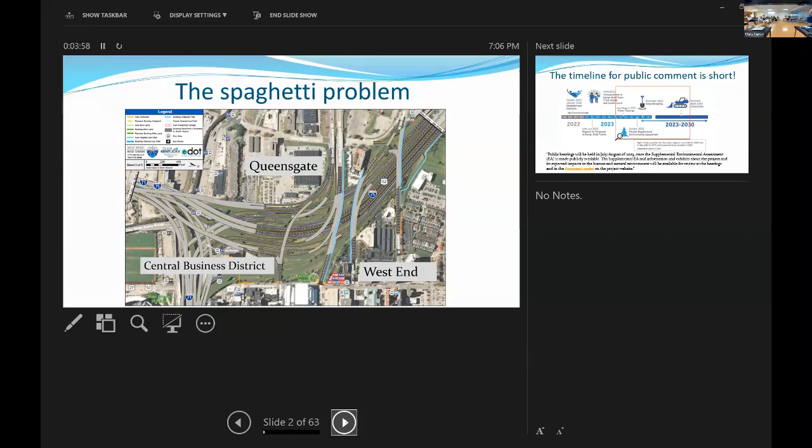Going to give you a very quick overview, literally 2 slides, about concerns that we've raised and we've taken to City Council, Hamilton County Commission, and it's the spaghetti mess that you'll hear more about from Josh Junker. But when we built I-75 and the 71 connection, we cut off and segregated literally Queensgate, West End, and the Central Business District. So we have a chance to take care of that.

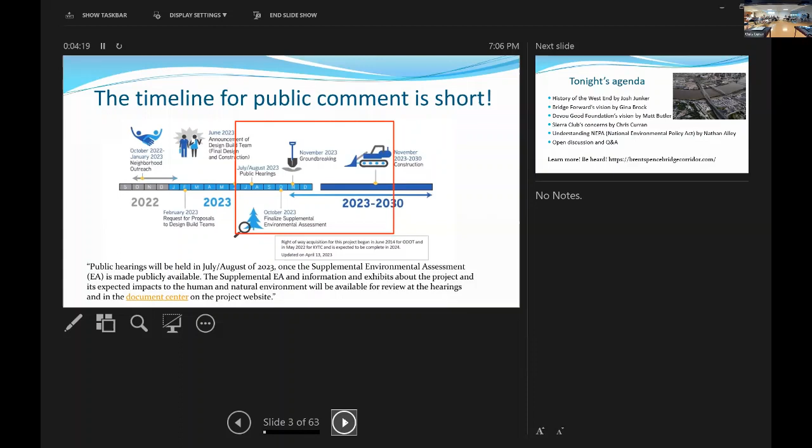The other reason we're doing this in July in the middle of summer is the public comment period is essentially very short. The current website says July to August, we know it starts July 5th. So when it's time to act, which we'll talk about at the end, we want to make sure that our voices are heard. So what we're going to do, because it does take a lot of different expertise...

With our panel, we have Josh Junker from Bridge Forward, who will talk about the history of the West End and the environmental injustices. Gina Brock, Vice President from Bridge Forward, will talk about their vision. Devou Good, we have Matt Butler, who will show some animations of what is possible. And then I'll talk about our concerns.

So we're going to get sewers in here, we're going to get air toxics, we're going to get water pollution, of course, covered. And then one of the important things is responding to the updated environmental assessment. Fortunately, we have Nathan Alley, our full-time staff, who has quite a bit of experience with NEPA. So he will explain what it is and how we can use it to all build a better bridge and a better community. So I really appreciate all of our guests.

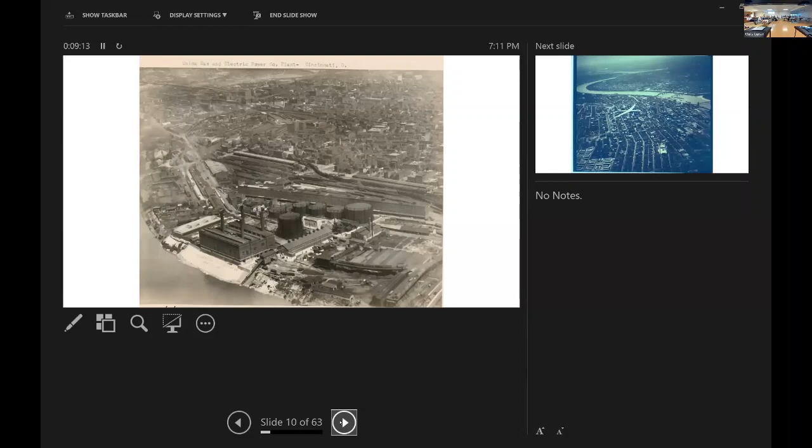And this is a really good picture that I found. These are all from the National Archives catalog, which I hadn't really perused until about 2 weeks ago. I was like, oh, they have really high quality images.

This is kind of what we're talking about. So that's Longworth Hall right at the foreground behind the tanks. That's that plant that still exists today. They built that in the late 1920s. You can see the rail yards and everything right there as they existed. And then just beyond there, that's the Lower West End and where it begins.

By the late 1920s, when this was taken, you can tell it's the late 20s because the terminal isn't in there yet. You can see it's a very thriving neighborhood. It's very dense. It reminds you of what Over the Rhine is like. It goes all the way towards Lower Price Hill. It's only separated by the Mill Creek.

And it's approximated around this time, around 71,000 people lived in the West End. This peaked in about 1900, where we had 84,900 residents in the neighborhood of the West End.

This is a really cool photo, and it kind of illustrates what had started changing. So this was actually from, I think it was a B-36 - someone corrected me on Twitter about that - B-36 test run in the early 1950s. Below it, you can see downtown Cincinnati. It kind of looks recognizable, and then you look at City Hall, and everything after City Hall is still kind of intact. There had been some industry that had started to develop and everything.

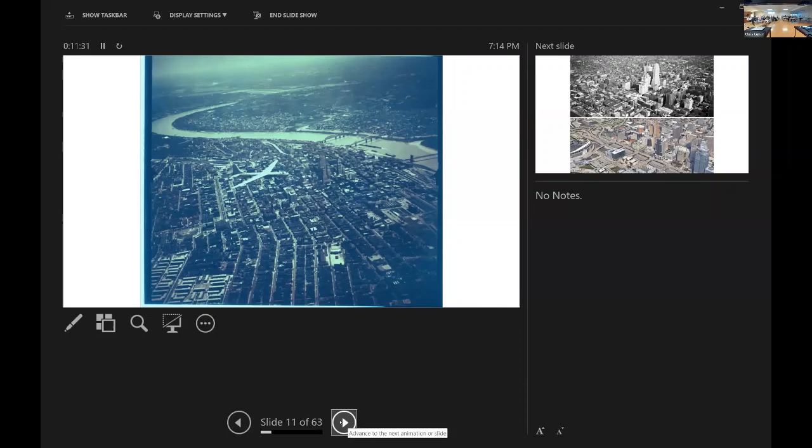And this also shows what we're talking about as well. So that's a view, and it kind of shows not only the destruction of our riverfront that we did by building the 3rd Street distributor, which is known as Fort Washington Way, but it also shows how much of a gash we cut in by building the highway west of downtown into the West End. It's amazing looking at the Cincinnati telephone building still exists, which is like a 150-foot structure.

Everything west of there is similar to Over the Rhine, same architecture. It was built around the same time period. Most of that was like Italianate architecture of similar style as Over the Rhine. And it was actually, in my opinion, built better because it was built by wealthy Cincinnatians from the 1860s to the 80s. A lot of that was built really well.

And then around the turn of the century until around the 1920s, the Great Migration began, and slowly the West End began to become the center of Black culture in Cincinnati.

What made this interesting is - I don't know if I put in a flood picture, I don't think I did - but the '37 flood marked a really key turning point for the West End because half of the neighborhood got flooded. And unlike all the other neighborhoods that got a lot of relief and were able to rebuild very quickly, didn't have filled in basements of water still 15, 20 years later, the West End, because of redlining practices at the time, wasn't able to repair the masonry that was there, unlike other city neighborhoods that were able to get access to that funding.

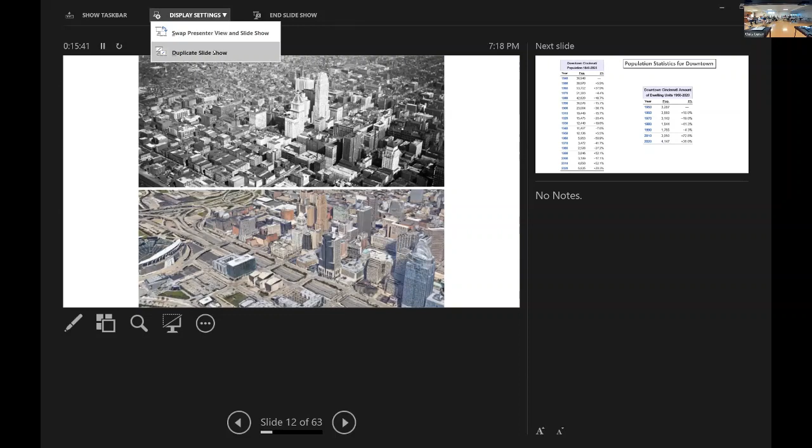The interstate caused a lot of the damage, but it was the city of Cincinnati that put the final death knell in the neighborhood, through their urban renewal plan. You hear statistics that say 6,600 families were displaced. That was a smaller portion west of the highway that included the highway right of way and was west of Interstate 75, basically in Queensgate. But if you include the entire projects, because the federal government said these are too big, you can't have them all in one project, if you include the entire total, it amounts to about 12 to 15,000 families displaced from 1956 until 1967, around that time period.

A lot of the damage was done with the spaghetti junction and Queensgate. There's opportunity with Queensgate, which was envisioned as an industrial center in the late 50s. They built it and envisioned 17,000 jobs, and I think now it has about 5,500 jobs down there. It never met projections. The motorways plan there was built for about 12,000 cars an hour coming out at peak rush hour times. It never comes close to that. I think Gest Street sees that in an entire day on average.

We kind of look at that as an underutilized area of what used to be a neighborhood. The city purposely stepped into that and said, this is what we want to do, and we think it's right. Every single time, every 10 years, there's a reevaluation process of what are we going to do at Queensgate. And everyone kind of says the same: it was poorly designed, it never met expectations. It tore down an entire neighborhood that drains what would probably now be a valuable tax base for the city, all for light scale, suburban scale industrial development that never met the expectations or created the jobs they were envisioning.

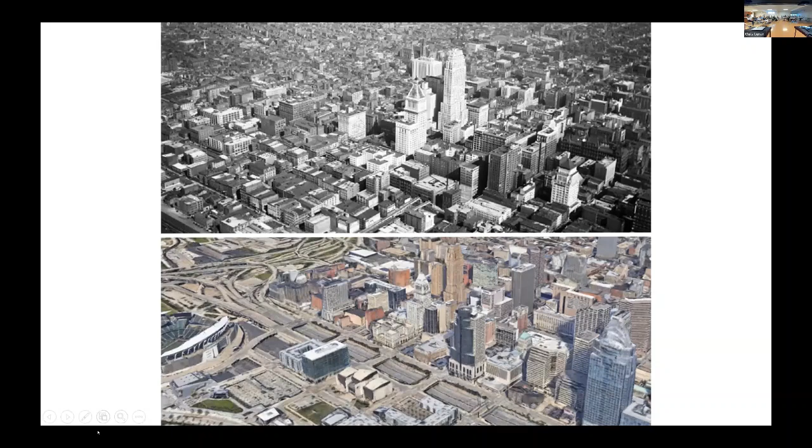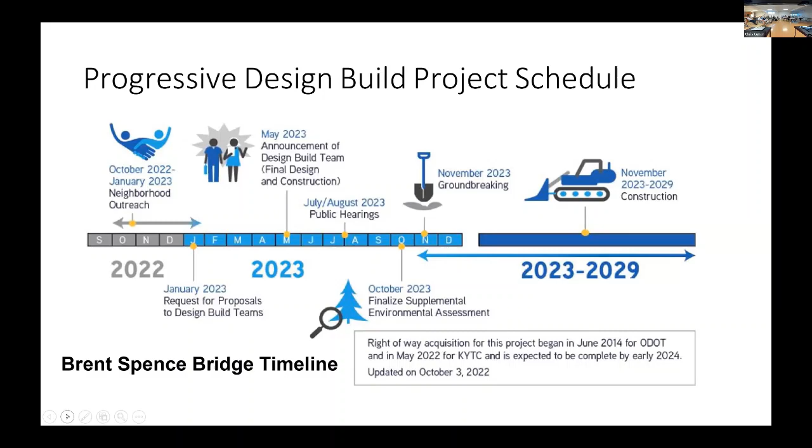So the reason that we're able to do this, the reason we haven't been shut out or not had enough time, is because this is what's called a progressive design build. You guys understand most construction consists of: you plan it, you bid it, you build it. In this particular case, especially based on the size of this project, they're going to start, as my understanding is, with the bridge in the river. So the design of the progressive design build project schedule is meant to accommodate changes, upgrades, everything that needs to happen with conversations with communities. It's specifically designed to allow this to happen. We don't have a hard cutoff date where past this date nothing can change. That's inaccurate. But this is the first and very large progressive design build ODOT has taken on.

So Brian Boland, he's the president, and the one who came up with the idea of what can we do to make the bridge happen, even when it's being stopped by the fact that Kentucky got smart and said you cannot legally build a bridge from Kenton County to the Ohio side of the river - it's in law, you cannot build a bridge there if you toll it. So he came at this trying to decrease the expense of the project so we could see if it would happen. At the time he came up with it, there wasn't funding there, so he was investigating and putting thought into it.

And he looked at Fort Washington Way and said, we gained 14 acres in Fort Washington Way. We went from 23 different on-ramps and off-ramps and a whole lot of traffic problems and crashes. We made it safer, we made it faster, we reclaimed land. Why can't we do it again? Let's look at this project and do the same thing.

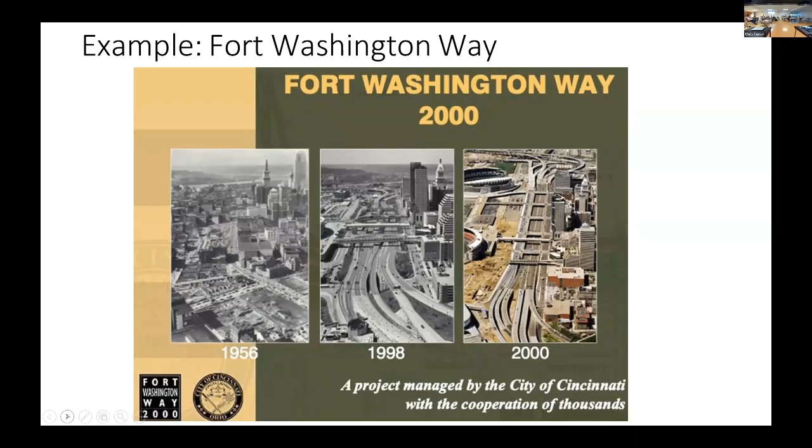So a small progressive design build project was actually the Martin Luther King Jr. interchange, and it's a good example of what ODOT can do when they work with the communities they build in. They listened, they talked about what we wanted. They did some things that were a little outside of the norm - it has the world's longest off ramp, over a mile long - but they listened and did what was requested, showing there's a lot of benefit to be gained from working with ODOT and taking our feedback as a community, doing the things we would like, because we're the ones that live here. We have a little bit of opinion about it.

So far, right now with the current IW plan, we do get back 9.5 acres of usable land. It does have on-ramps and off-ramps as requested back in, I believe it started in 2004, 2005, 2006. They do have the connectivity that we asked for then, and they have redesigned overpasses for improved pedestrian and cyclist experience. However, if you're still going to go a half mile on an overpass, no matter how pretty it is, it's not going to be as usable nor attract people as much if you shorten it and make it integrated into a street grid. Any improvements are fantastic, but we think it can be better.

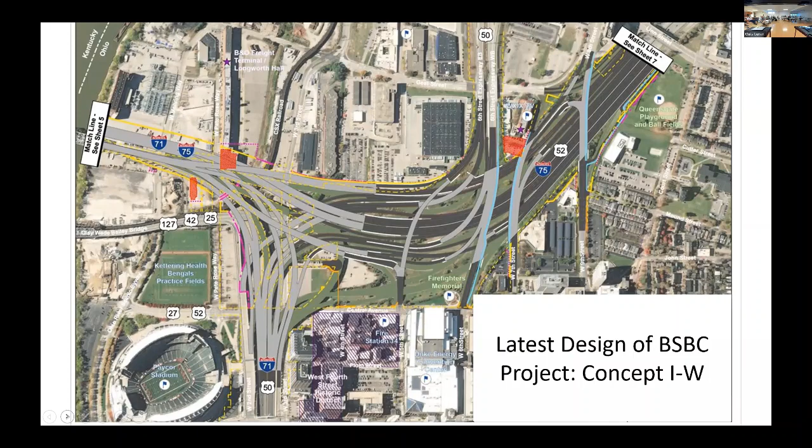So I do appreciate the work ODOT's done, but we can do everything that ODOT needs this bridge to do. The on-ramps, the off-ramps, everything on the Kentucky and Ohio side — our plan can give everything to ODOT that they need to make it work. But we can do it better, in our opinion, for Cincinnati.

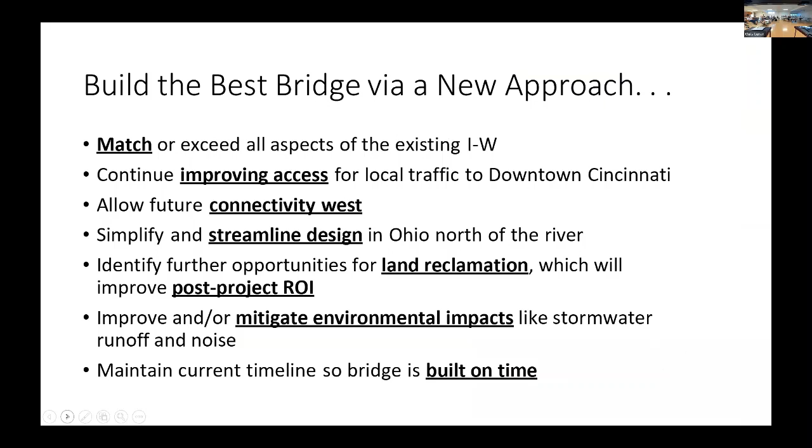So I'll tell you right now, this is the more cartoonish version. We have had our ideas vetted by an actual traffic engineer in Indiana who's certified in Kentucky and Ohio and well respected in the industry. But we're going with this version, which I fully acknowledge is pretty tidy — anytime an engineer gets in there and actually does things, everything gets slightly bigger. So the reclamation of the green here is not going to be quite as clear when we go with the final design. But this color coding makes it a lot easier to understand.

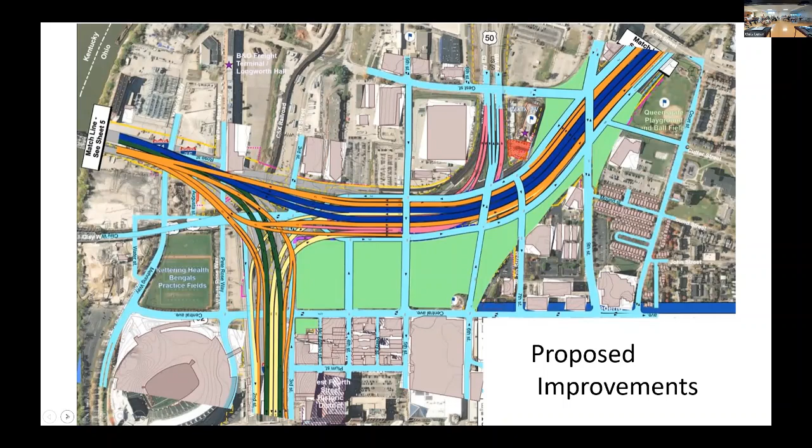So in our improvements, we want to have a Fort Washington Way style connection. We want to make US 50 a little bit safer and saner to keep that connectivity, but make it easier to get on the expressway and into downtown. We want to simplify exiting — instead of on and off ramps, we want to reconnect the street grid. As you see in Fort Washington Way, the street grid runs right over top of it, and you have the benefit of that being a street block instead of on-ramps and off-ramps everywhere.

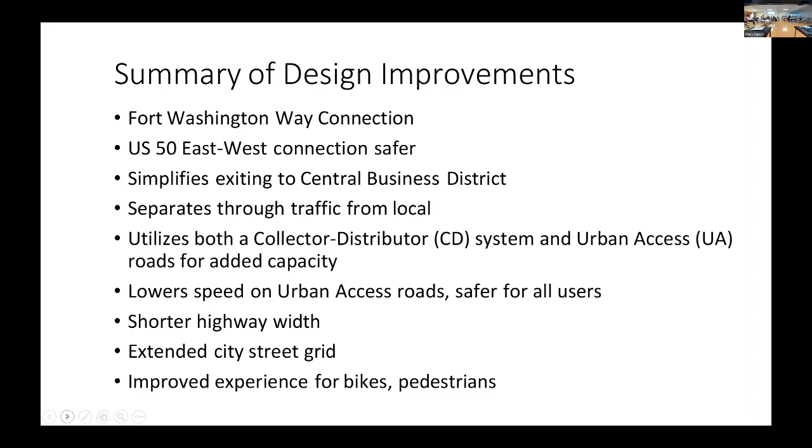One of the other things is that the shorter highway width really makes that space much more attractive for walking, pedestrians, and cyclists, because you're not baking in the sun as you go a half mile across an expressway — you're just going down a city grid street. And any land that is reclaimed has street frontage. We can reclaim all the land we want, but unless it's well connected, it's not very usable. Right now we have a lot of green over there, but it's not like they built on it, because there's not a lot of ways to get there. It's not very useful. But you reconnect the city grid, and all of a sudden you get all sorts of benefits to reconnecting Queensgate with downtown.

And then you get a lot of other asks, and you guys are interested in some of these in particular. For example, big fan of the idea that if you're going to go in there and touch things, then fix what's there. If you're going to dig up an area, do the work that needs to be done while you're there, particularly for MSD improvements.

They are doing this for the Kentucky side. They are getting a stormwater handling system on the Kentucky side that is great for them. It's going to take care of some of the problems they have, separating and preventing flooding, addressing those sort of issues. We can get that on this side. And now that we have the policymakers of the city and the county on board, those requests are being made.

So our goal is just to make sure that we ask and we get. And right now, ODOT seems to be very much in the mode of listening and understanding where we're coming from when we're making these arguments.

So, I can take questions now, or I can continue on and break down this picture. Quick question, can you just...

Flesh out what separating means for everybody? Oh, the concept behind MSD.

So as most people here probably know, Cincinnati has a problem with combined stormwater and sanitary sewers on the regular. When you have too much stormwater, it dumps into the sanitary system, and then you have overflows. We are under federal injunction to fix it, and we have gone to great expense. The South Paramount project that was just done is a good example. There are different things in the Brent Spence corridor that could be improved, and if we're going to go in there to do the work, those things should be addressed while we're there, because we're under federal injunction to get it done. If we're going to break open the ground over there, let's do it while it's there. You don't break off the drywall from the wall, look at the leaking pipe behind it, and then put the drywall back up. You fix it while you're there.

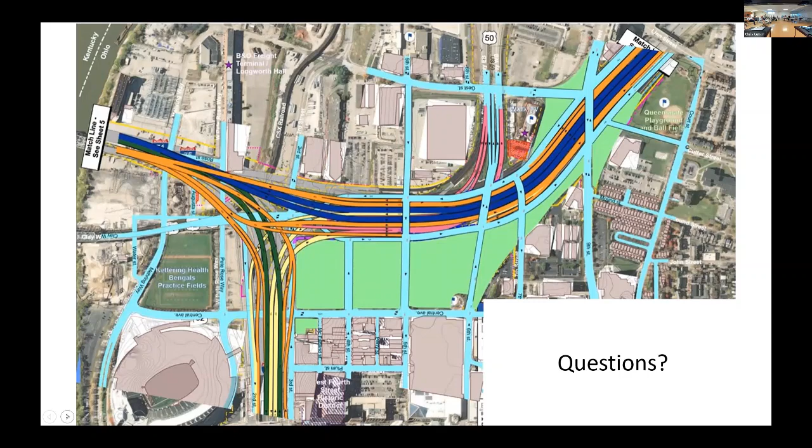I've got a small question that's not directly important. Do you have any input at this time from Jim Tarbell? He has been somebody that parts of our organization have spoken to, but I do not know his actual personal opinion. Yeah, I believe he's been spoken to, but I don't know what his opinion is on it.

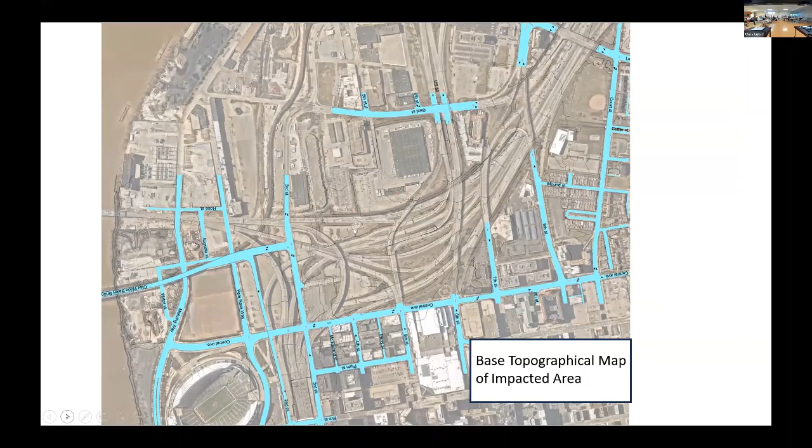We can skip through these, or if we're running out of time, I can go through them real quick. We're a little over, but you said you can slide through, so let's do this. This is the base map. You have the city street grid called out in blue.

Next slide. We have the same amount of connectivity for 71 and 75. ODOT's IW plan only has one extra lane heading on 75. We include that extra lane. The rest of everything else is reconnection.

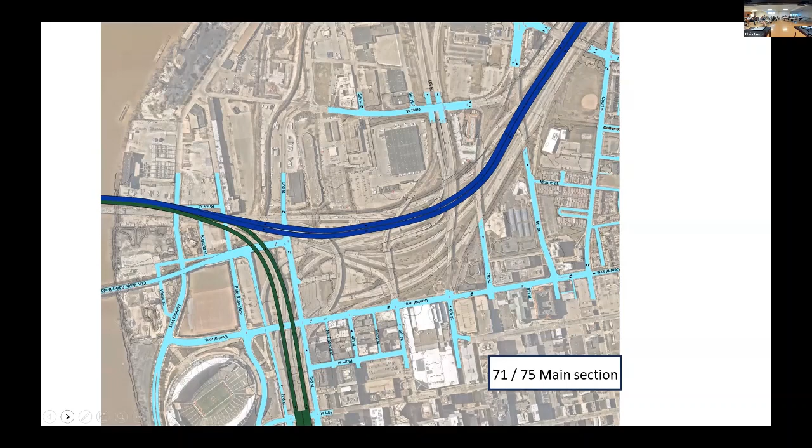So we would like to see a collector distributor that is surface streets. It connects Queensgate, which, as Josh pointed out, the market's kind of spoken on how much new and innovative business has been attracted there. Not a ton—right now it's sort of a location for a lot of trucking companies. This could change with a reconnection to downtown.

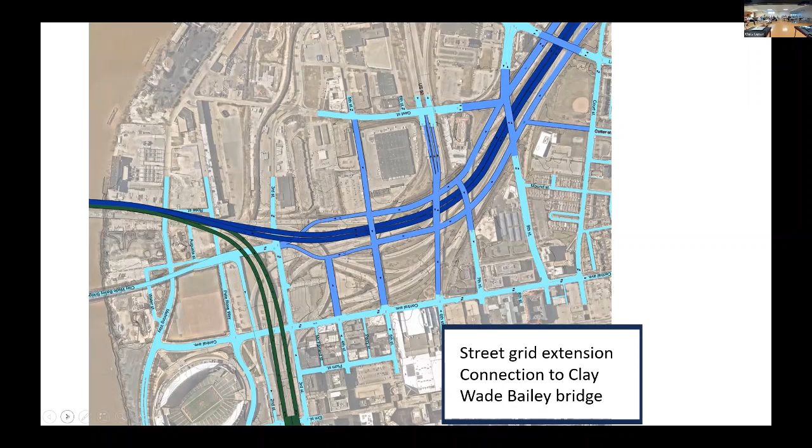71/75 connections are maintained. A local traffic connection collector distributor is also preserved from the IW program. It just connects slightly differently and brings a lot of stuff tighter in. Again, with the actual engineering drawings, those do get wider, but not as wide as what IW does.

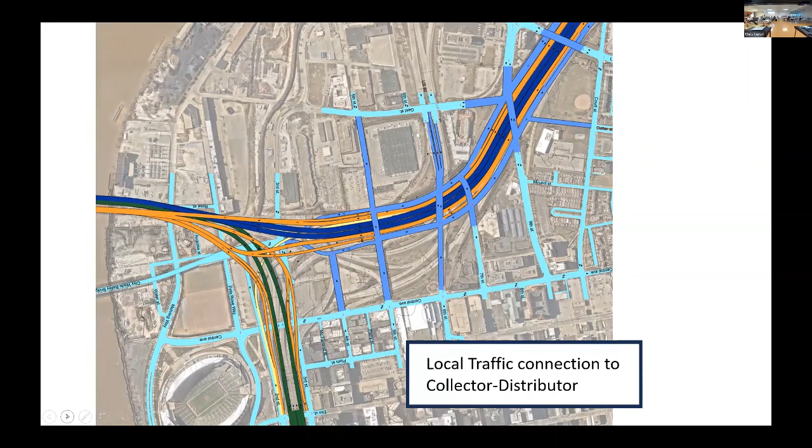Now, part of the reason is because we take US 50, and instead of doing what IW does, we bring it in and it kind of goes into what they're wanting to call a tunnel. Some engineers say it can be more of an open, vertical overpass system. That is still being decided, but people are taking a look at that.

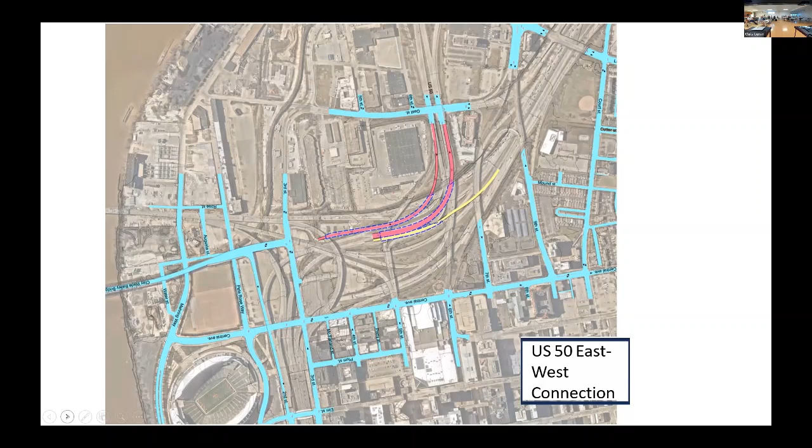And then US 50 to I-75, we keep that connectivity for all of the west side, and then you have all the connections. Ideally, this is pretty to look at, but even when the engineers get through with it, we still capture vacant land. But the street grid makes it usable.

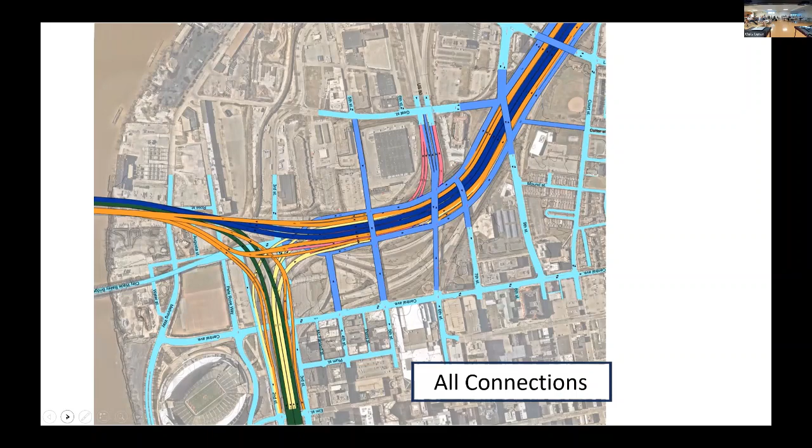Great. So what we're going to do is then hear from Matt Butler, who is the president of the Devou Good Foundation, who has invested heavily in this work and also has a vision.

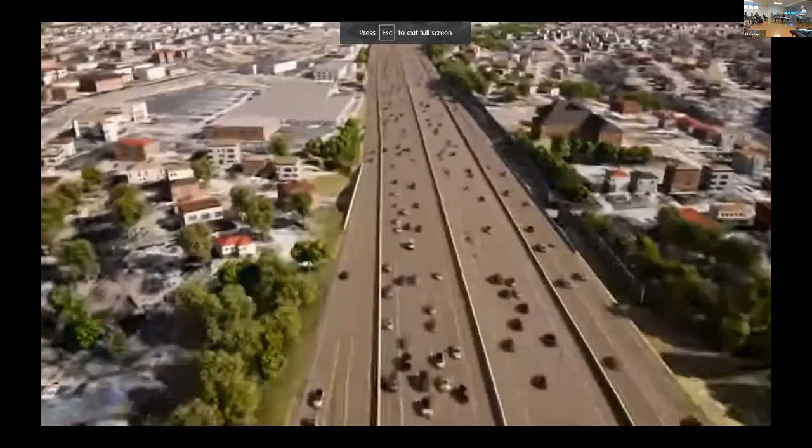Gina talked about safety on the bridge. KYTC, I believe in the 80s, restriped the bridge and prioritized speed and driver throughput over safety. So it was 3 lanes with breakdown lanes, and they restriped it to 4 lanes, thinking that would allow more vehicles to pass through. Since 2014, traffic has actually dropped on the bridge.

We've got a graphic to show you that. But projections from ODOT and OKI have all either remained about the same or gone up. And of course these are projections they're saying are 15, 20 years in the future, so nobody's going to be around to hold them accountable for that. They just keep doubling down on this.

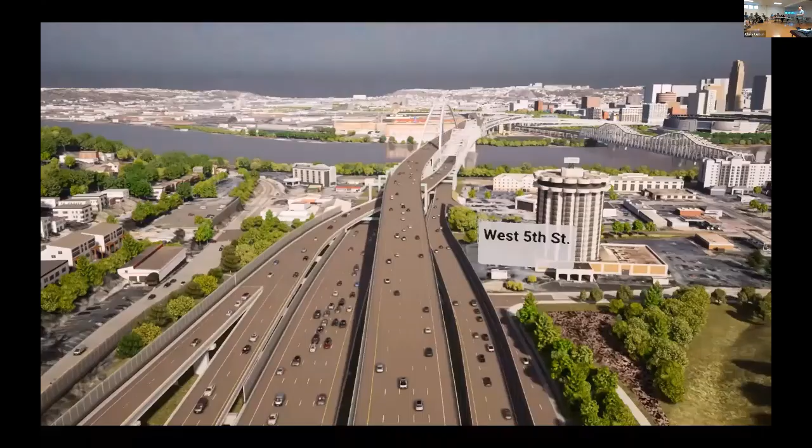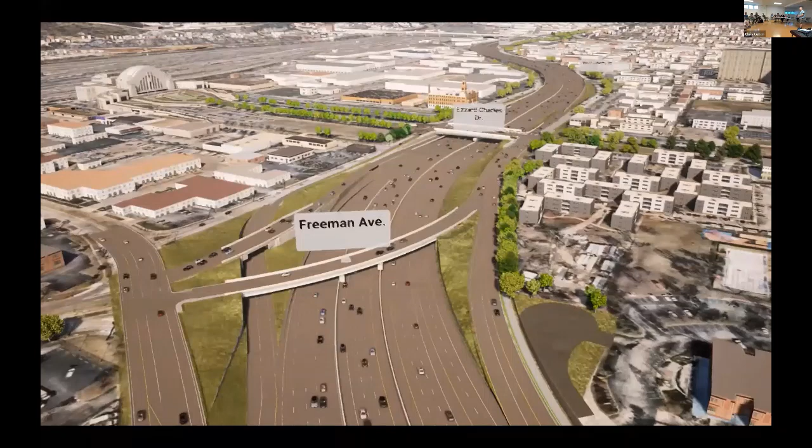Well, it's been 20 years and now their projections are pretty current from what they said 20 years ago, and they're not anywhere near what they said. They were saying 225,000 to 250,000 vehicles a day on the corridor, and we're around like 140,000, and it continues to drop.

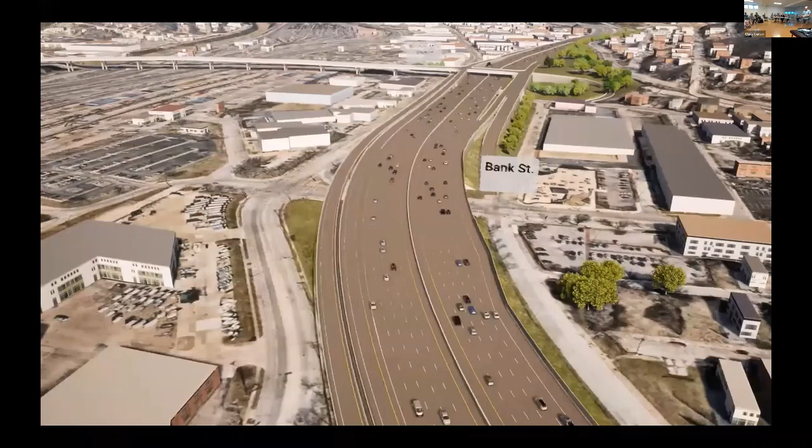We also think jamming this other bridge up against the current bridge is not good aesthetics for the city either. If everybody wants a nicer bridge, why don't we just remove the one that's there and put in a new one? We all survived it being shut down for a couple months, a couple years ago.

I think some other data points. I'm not as good as Josh, I can't recite the whole presentation off the top of my head.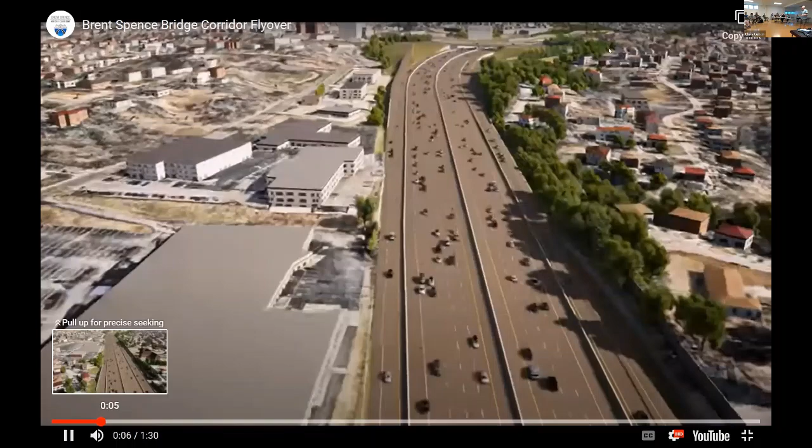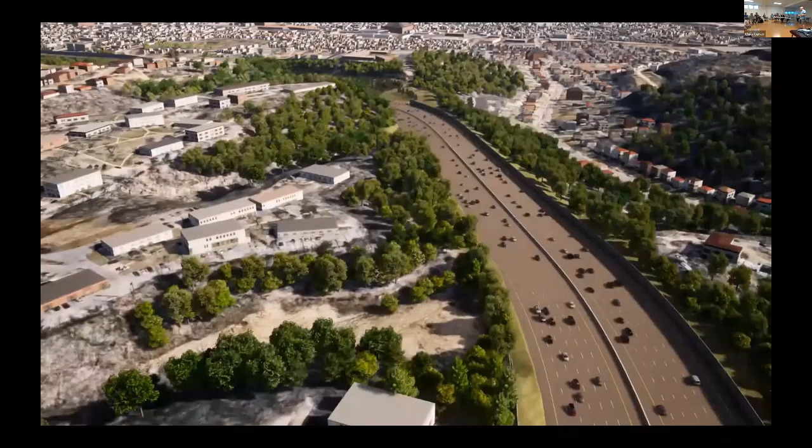But the communities that are impacted, the West End communities, the communities in Covington, these populations are largely minority - Latino populations in Covington, African American populations in Cincinnati.

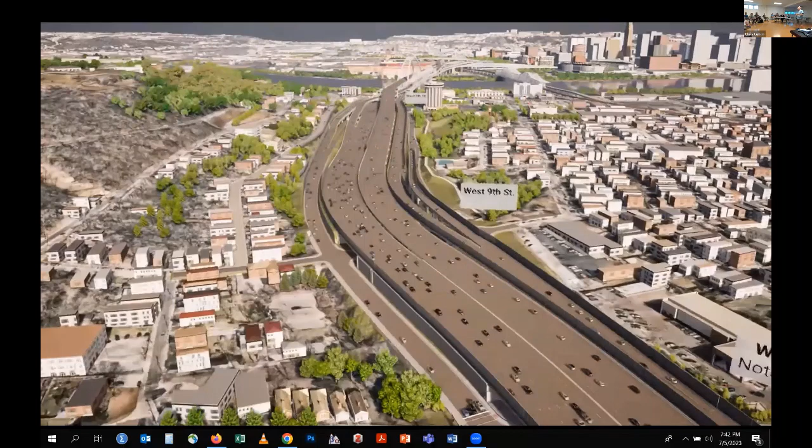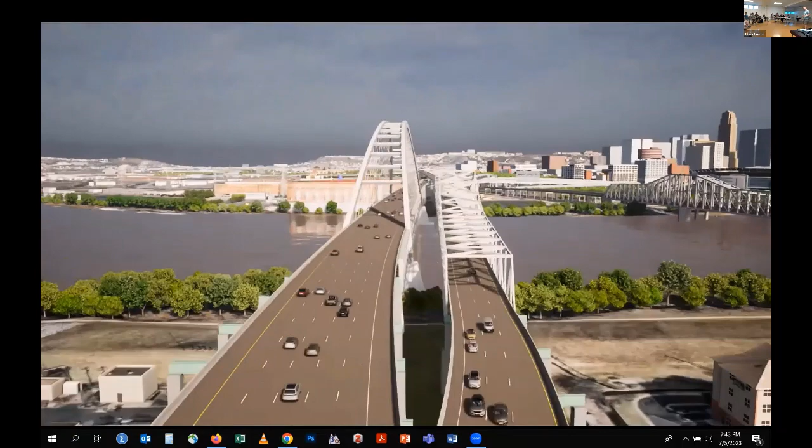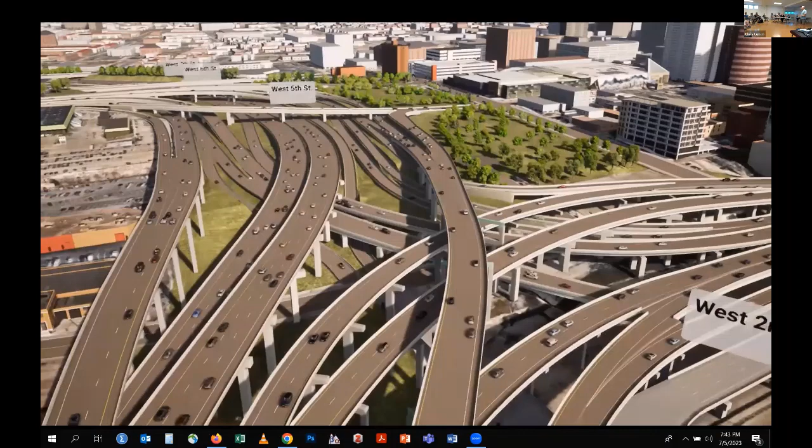Does anyone know what percentage of households don't have access to an automobile in Cincinnati? Like 20 or 22%, yeah, 22% exactly. And a lot of these neighborhoods that are adjacent to the bridge, in Covington, there's one that's 40% of the households don't have access to an automobile.

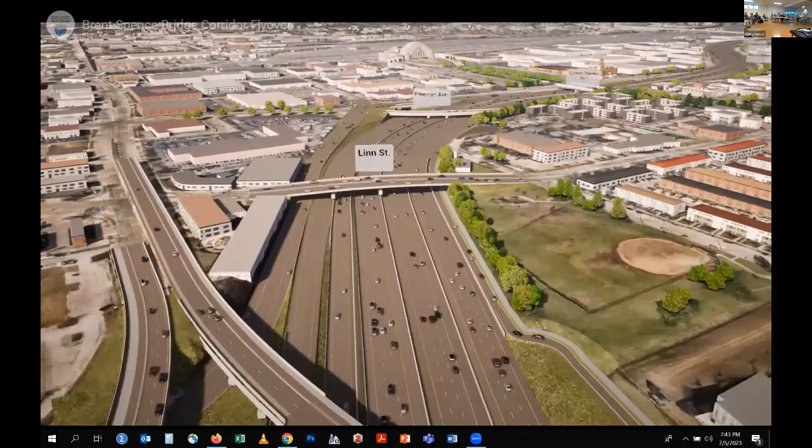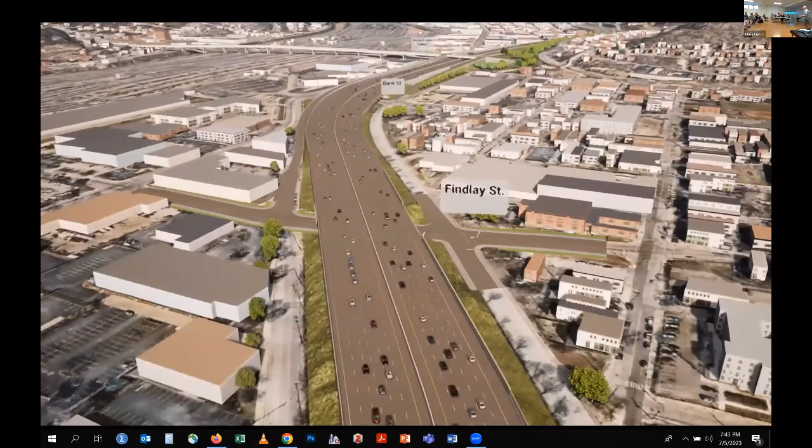Cincinnati, the West End, on the inside - what is that called, between 75 and downtown, that part of the West End? The West End, right? Yeah, that one is over 50% of the households don't have access to an automobile. So the people that are going to bear the brunt of this through more air pollution, more sound pollution, more stormwater runoff, they won't even actually be able to access it because they don't have an automobile.

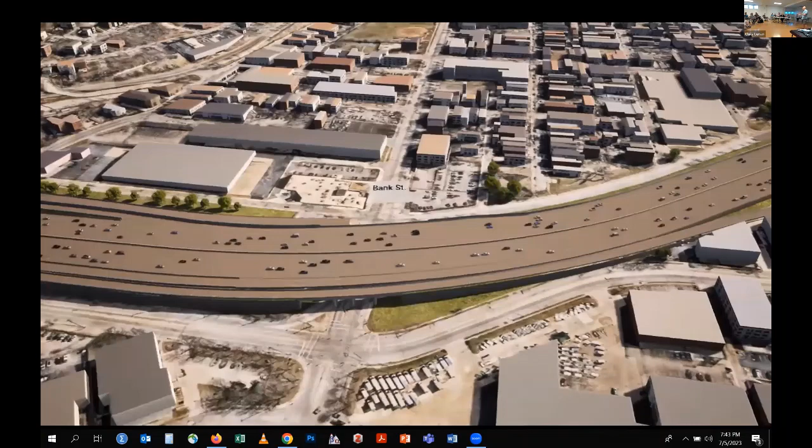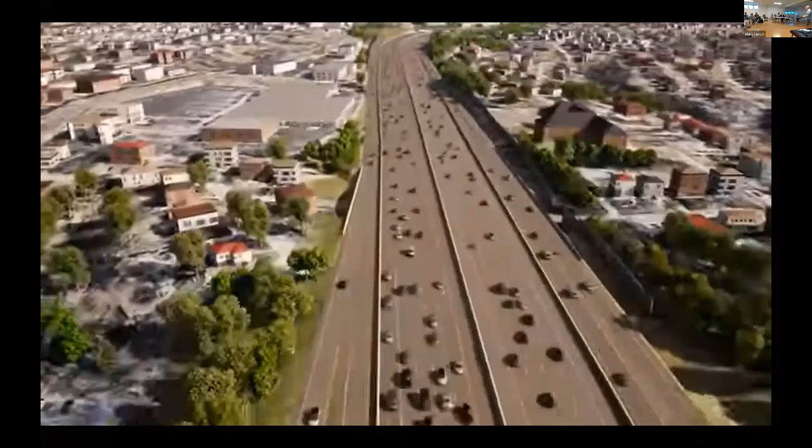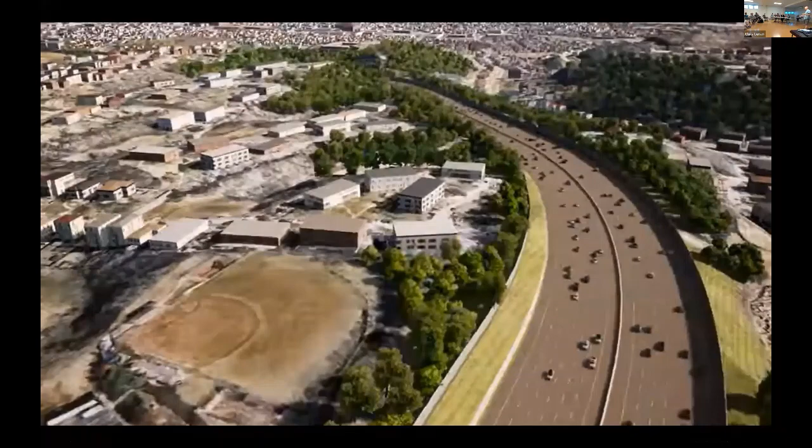And where did this plan come from, and why do we have this plan? Well, there's a plan, it's on OKI's website. It was put together over 20 years ago, it's called the North-South Plan. You can Google it, look it up, we've got a link to it as well. The North-South Plan is thousands of pages long, and one part of it talks about expanding the I-75 corridor, adding more lanes.

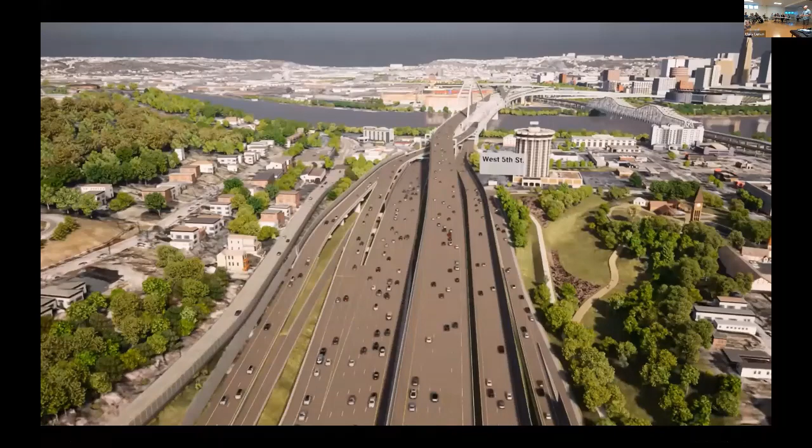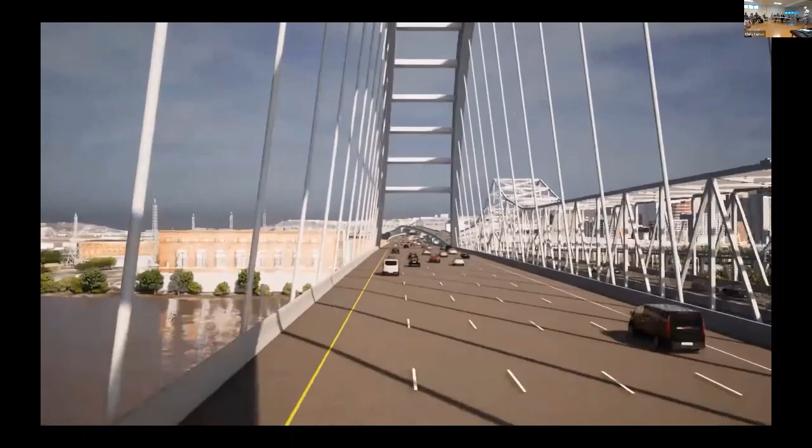But it also has transit, commuter rail in there as well. So they've pulled this shovel-ready plan off the shelf because all of a sudden the federal government said, here's all this COVID money. This project is greater than ODOT's budget for the whole year, for the whole state of Ohio, so it's enormous. Austin's building light rail for about 100 million a mile, so we could have a fully outfitted light rail system for $3.8 billion. And that's actually in this plan, but they're just choosing to ignore it.

Talked to John Brazina at DOTE. He said, well, this is a car town, no one's ever told us that they wanted anything but more roads. And I interrupt briefly - yes, the cost of maintaining rail is so extremely low compared to roadway, that alone could really make a difference.

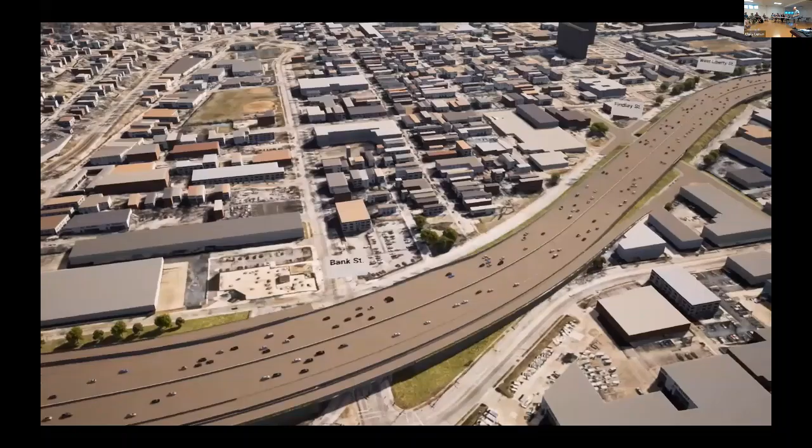Yeah, if you've heard, Cincinnati has a major issue with resurfacing roads, right? We're supposed to resurface 100 miles a year, and we're barely getting 30 miles done because the cost of chipping off the top bit of asphalt and putting it down new has gone up, and the budgets have gone down. Thank you, so yeah, absolutely.

Not only that, but the roads that we have are too wide, and that's another reason that speeds are high, people are dying.

That probably took it away from the person. Yeah, I was afraid that would happen. I think... so now you guys can finally see it. They've seen it five times.

So this is actually ODOT's video. As you notice, it doesn't really have any trucks on it, it doesn't have pollution, it doesn't have sound. You can now - the cars are happily spaced nicely.

Yes, I think that a big issue for Covington is the massive size of this. So right now it's a double decker, right? There's one layer off the ground and then another layer on top of that off the ground. They're going to add a third layer on top of that to get to the new bridge. And so Covington's most focal point is going to be this massive flyover.

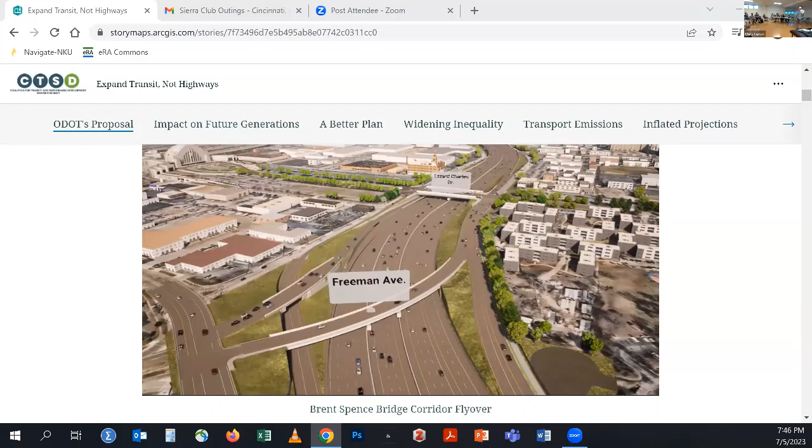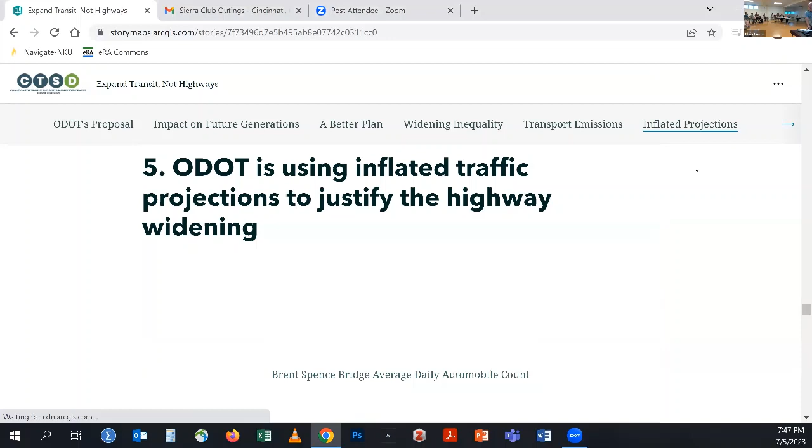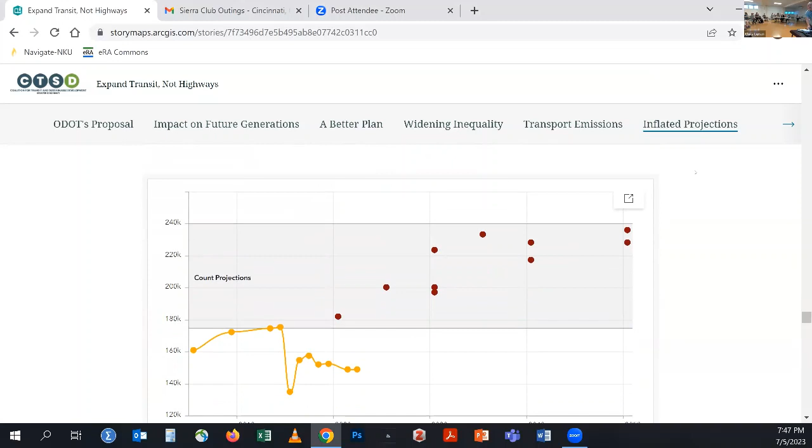So I think that I will quickly show you the inflated projections here. So the yellow is the actual counts and the reds are the projections that have been made over the years. Would you like a chair? I'm good, thank you. So I always get the question, well, what happened in 2011, 12, 13, this major dip right down here, right?

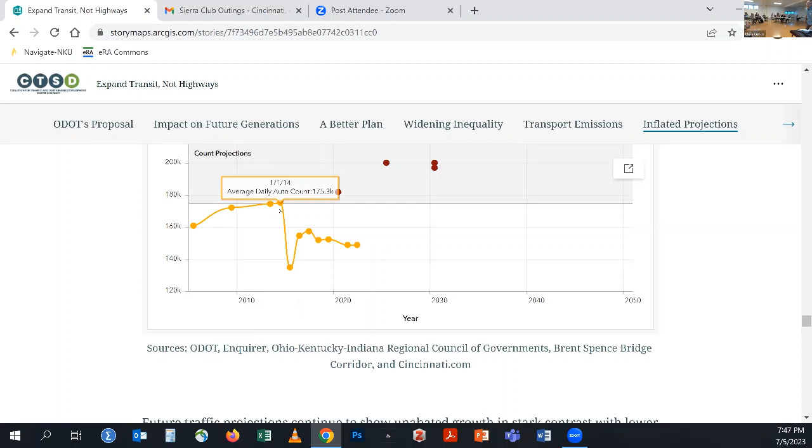And through research, the only information that we've been able to gather is this quote from Lori Platt at OKI. The reason for the reduction in traffic on the Brent Spence basically in 2014 is due to the construction north of the bridge that began in 2011. And if you've been paying attention to that corridor just north of the bridge, it's still under construction, right? We're 12 years later. And so drivers have kind of figured out, okay, I'm going to avoid that and go a different route or combine trips.

And so ODOT basically did this to themselves, and it's never recovered. So it came back up a little bit, but it's slowly gone down. We took 2020 out because that shows a major drop and it just throws the scale off and it's really not pertinent. But you can see where the red dots are - these are the projections that have been made, and these are ODOT's, OKI's, KYTC's projections.

We've gone through all the archives in the Enquirer, because they started talking about this around the year 2000, and that's when they started putting out these inflated projections. So we're at 145, 150,000, and we were supposed to be at about 180,000 plus. In like 3 years, it's supposed to be at 200,000. I don't think anybody, even the traffic engineers, believe any of that will happen.

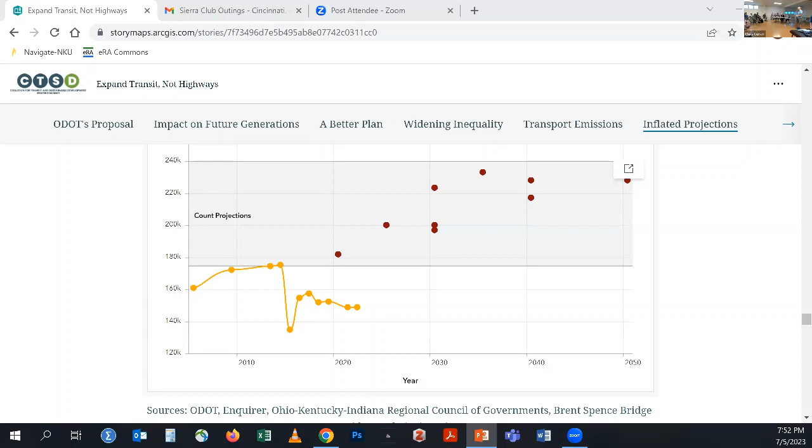Have you explored, beyond the local issue, the question of freight movement by truck? It's not very long ago that we had a pretty good classification yard down here, and most freight was moved by rail and then trucked out to delivery points. Trucks are the major problem on 75 now.

Yeah, I can say from my background — my wife and I started an e-commerce company in 1999 called Signature Hardware, located in Erlanger. We shipped product, mail order. We bought direct from factories overseas and brought it into 400,000 square feet we had in Erlanger, then shipped one part at a time out to retail customers who bought online. The cost to truck freight is so enormous compared to rail, so we always focused on getting it from the port via rail, but of course the last mile has to be truck.

We actually owned a warehouse that had a rail spur to it — it was a paper warehouse at one time — but they've pretty much eliminated that type of transit. There aren't many companies that actively use their rail spurs to ship anymore. A lot of times customers want the product quicker, and truck could be quicker. At the time, I think it was 4 to 5 times more expensive.

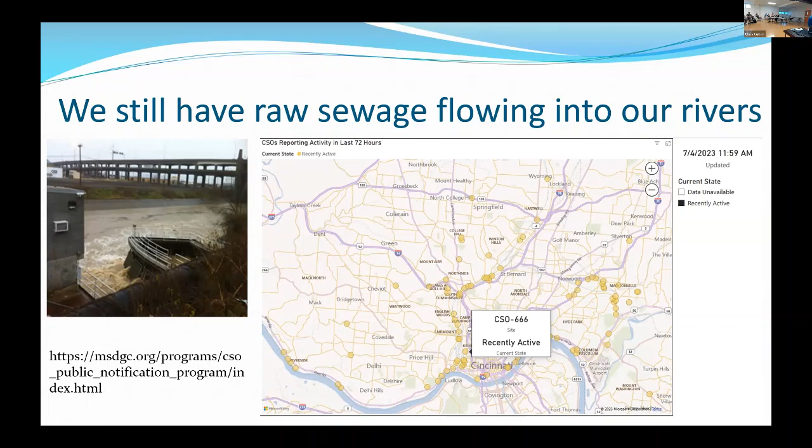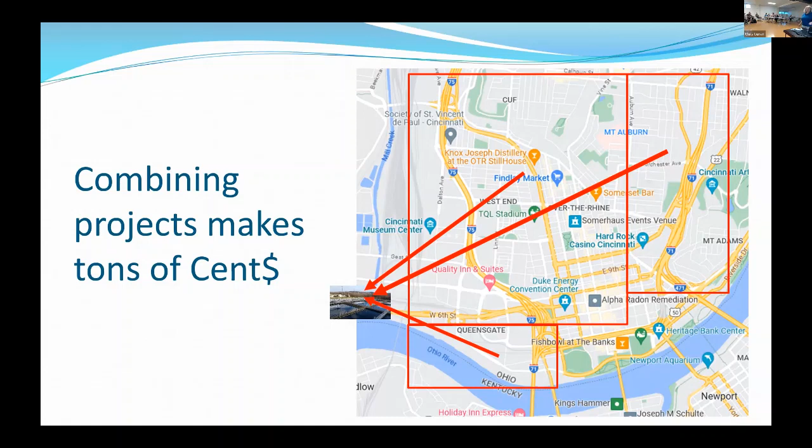So right now, this is a map. Bob Park helped identify where these combined sewer overflows are. And so what will happen is it either is going to end up at the Mill Creek plant or overflowing directly when there's too much stormwater. So combining projects makes a lot of sense because this is the target area, what we're calling the land of opportunity, where most of these are, as you saw, are right where they're going to be digging things up and changing things.

And it's been done before. So the blue, Fort Washington Way, Smale Riverfront, the two stadiums, we've done it. So those are now separated. And what happened now is they separated them up north, and then they get recombined down here. Makes no sense, right? So these are maps that we've taken to City Council, Hamilton County.

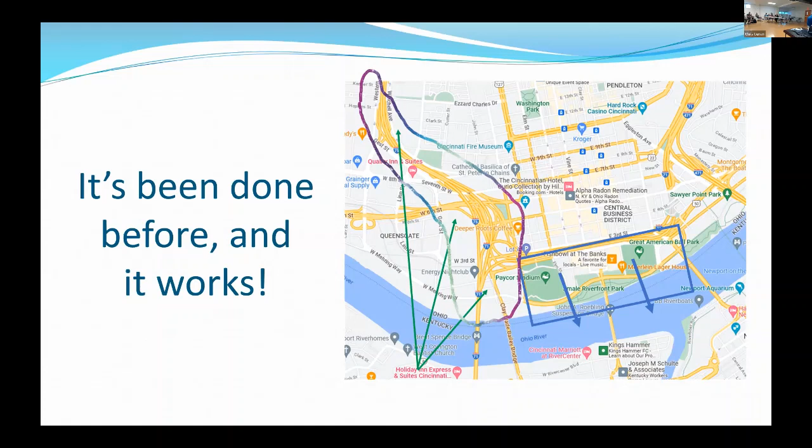So this is part of our advocacy. We've known since the 90s that what is running off is not clean water. So your rain barrel does a great job, but if it's running off a highway, you've got the brake linings, you've got the tire debris, you've got a mess rushing off, including, these are all Ohio EPA discharge limits. This was measured along the highway. So build more lanes, more traffic, you're going to have a real toxic problem.

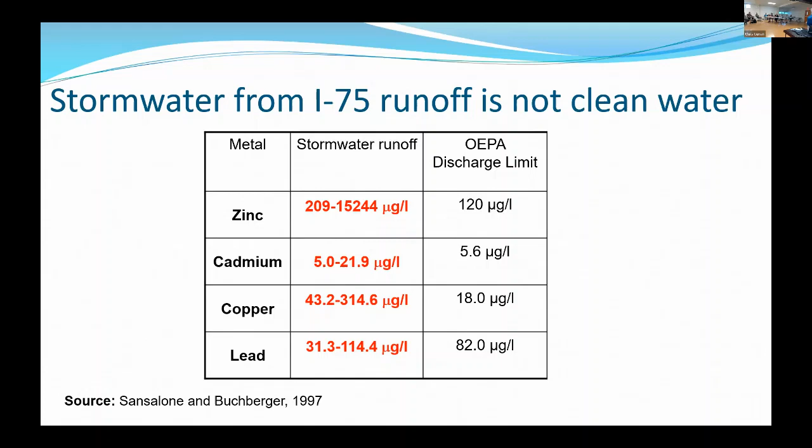So stormwater management is more than controlling the flow. And there's technology that we've known for decades on how to solve that by filtering it as it runs off. So you got to catch it, you got to keep it clean. We can do something. Obviously, we are all on the same page. Transportation is about addressing everyone's needs.

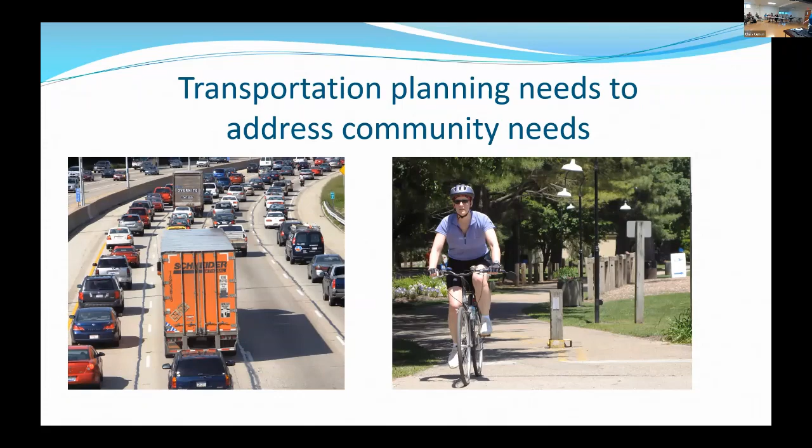And so some recent data from the Census Bureau, we are at an inflection point where I'm going to be in the majority. Many of us are going to be in the majority. So my grandkids, unfortunately, will not. So what are we going to do? So what happens when we're living longer and longer lives and we cannot necessarily continue driving? So we need alternatives. We need safe ways to get around.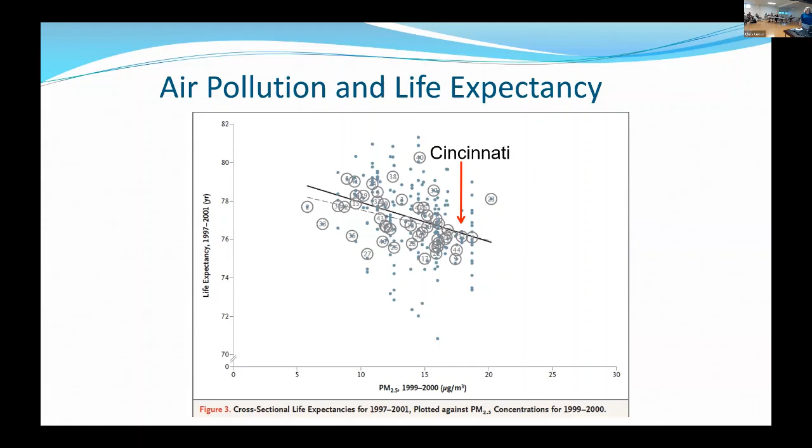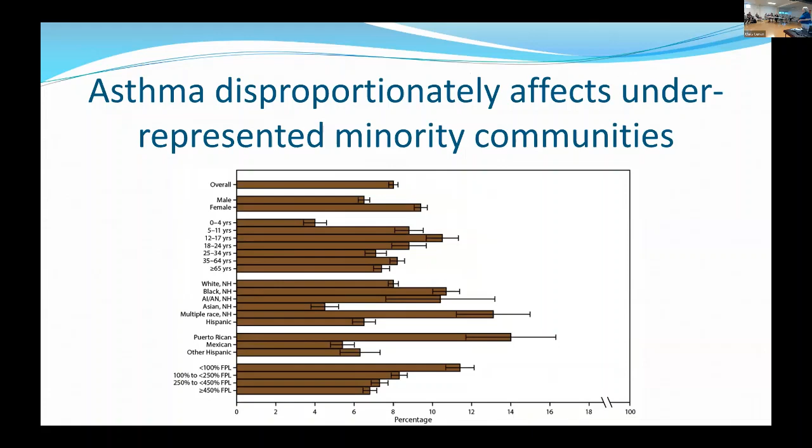We've known for decades that Cincinnati is in a bowl, and the Ohio Valley captures the pollution we send out, so our life expectancy is not as good as the rest of the world. Most people think of air pollution as just causing asthma—definitely an environmental justice issue. Who's most affected? Minority populations, because they live near highways and have other socioeconomic factors.

So these were some estimates I did on what just 2,000 more trucks would mean. Trucks are always looking for the fastest route, and right now I see a lot more on 275—they're detouring based on traffic maps on their phones. That's disgusting.

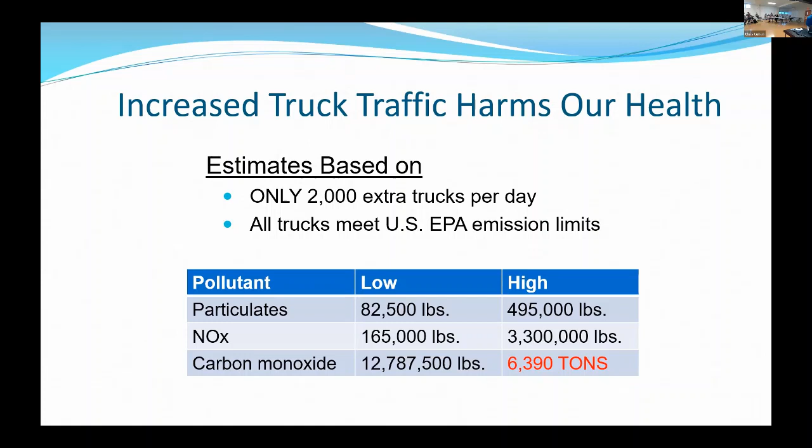We don't want that extra traffic. We want to constrain the project so we can constrain the problem, because those trucks stay on the roads for decades. When you invest in one, it's not like trading in your car every few years—expect it to be on the road for 30 years, that's why there's that range. What do we know about diesel? No good—known carcinogens, enough said.

In our own community, this has been studied. Experts at Children's Hospital, where I got my PhD in environmental health—this wasn't my work, Patrick Ryan was the lead on the CCAAPS study—have been following those exposed. Now we have no-idling zones around schools, so a lot's been done.

Now the big push is for electrifying the buses. But the longer you follow them, the more problems you find.

Woo! Okay. Did you do that, Nathan? There. Those touchpads, they hate me.

So now we had that hot sunny day—finally the wildfire smoke blew out, but now we have ozone because the stuff coming out of our tailpipes is getting baked. Neither one is very good.

This is what I study, my favorite, my little baby benzo[a]pyrene. These are complex chemicals—every time you burn something, cigarettes, wood fire smoke, vehicle exhaust, fossil fuels—nasty, nasty stuff.

This causes cancer, birth defects, and now some fantastic work out of Columbia University—Frederica Perera and her team followed children who were exposed, using backpack monitors on the moms so they knew they were exposed to this stuff. All the way through to adolescence, they're finding behavioral and cognitive problems.

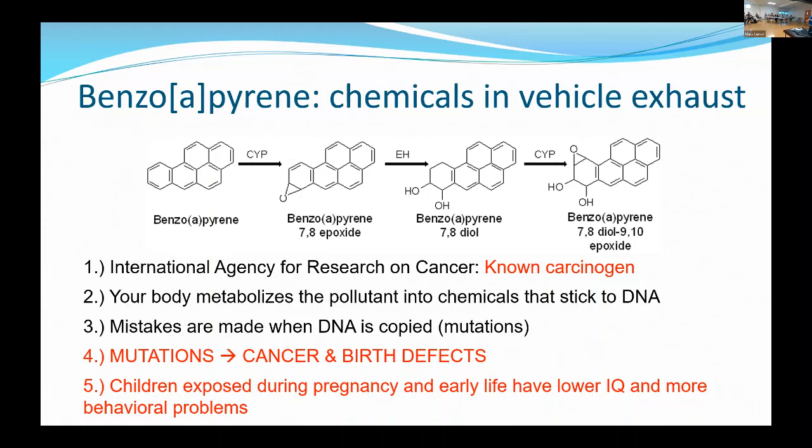So it's not just your lungs, it's also your heart. Look at this—1 out of 5 men are showing heart disease. Maybe we did part of this to ourselves. These pollutants not only harm our lungs, they harm your heart, they harm your brain. We're right in that dark red zone for highest rates.

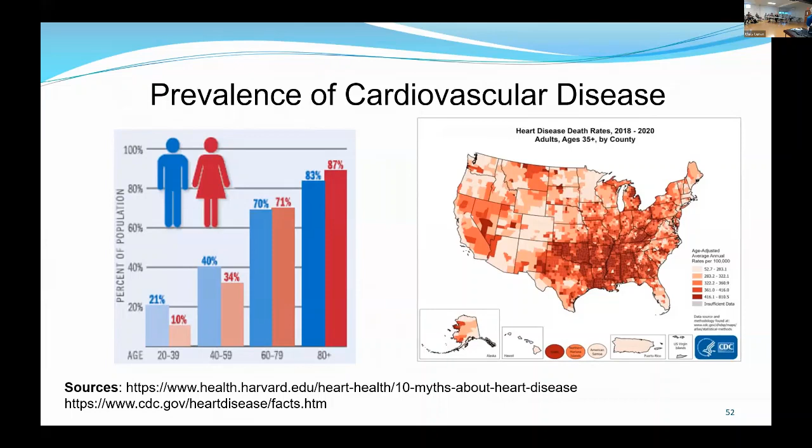It's not good, so of course there's a better way. We need transportation choices—it's healthier to walk and bike. Transit is an equal opportunity mode of transportation, but not if it's a 2-hour ride each way.

So how can you act? We called you here tonight to hear some great ideas, but also to talk about what we can do. Nathan's going to talk about this, and you'll definitely hear from us once those public hearings start. As you heard from Matt Butler, there are laws that work for us, not against us.

Hi everybody, I'm Nathan Alley, a Sierra Club employee. Grab your coffee, splash some cold water on your face if you're on Zoom, because I'm going to talk about some really exciting statutory stuff. This is a 90-minute lecture that I boiled into a 10-minute slide deck, and I'm going to try to do it in 5 minutes. I'm going to talk fast.

So what we're going to go through: what is NEPA? Who administers NEPA? When does NEPA apply? How does it work, where does it go, why are we talking about it, and what do we do next—hopefully in 5 minutes.

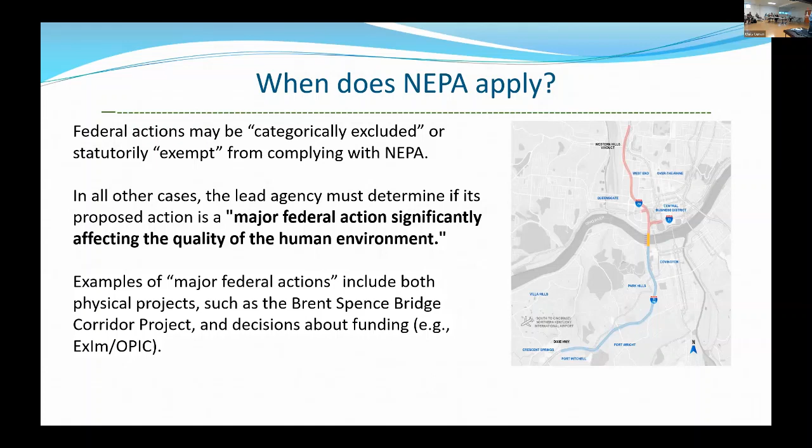NEPA, of course, has been copied by many other countries, international institutions, and a lot of states have what we call mini NEPAs. Unfortunately, Ohio is not one of them.

So how does NEPA work? You've determined your lead agency. You've determined that your project is major, that it may have a significant effect on the environment. What you have to do is prepare what's called an environmental assessment.

The EA has to include several very important things. Number one, it has to define the purpose and need for the project. Everything is going to flow from here. All of the alternatives that might be proposed, all of the new ideas put forth by the public, everything's looked at through the lens of this purpose and need statement. So you're going to find that in the environmental documents.

It also must include a discussion of alternatives to the proposed action, things that would basically meet that purpose and need, but might have different or fewer adverse environmental impacts. You have to study what those environmental impacts might be.

And that not only includes things like the acute air pollution that might emanate from the traffic or the runoff that might go into the river, but what we call cumulative impacts, which is how your project combines with other projects in the area, in the region, that lead to combined impacts. Stormwater runoff and air pollution are both also examples of cumulative impacts.

And then, it's a little obscured there, but you must not only look at impacts that you can see today, but anything that might be reasonably foreseeable in the future.

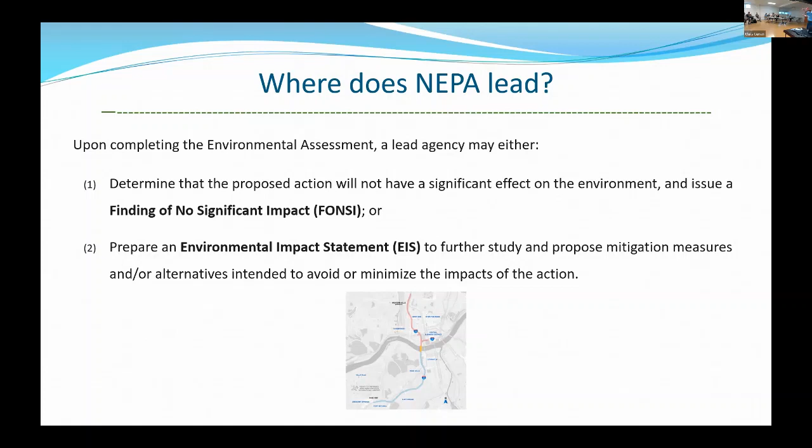Or if you determine that there may or will be significant environmental impacts from your project, you have to go on and prepare a full environmental impact statement, which basically does all the things the EA does, but more, longer, and in a lot deeper of an analysis.

So why am I up here boring you to tears talking about NEPA right now? Back in 2012, the lead agencies for the project—and I should say, when I talk about the project, I don't have it in the title up there, but it's here—we're not just talking about the Brent Spence Bridge, as has been noted. We're talking about the entire corridor.

It's like an 8-mile stretch, and it goes well into Kentucky. It goes well into Ohio. It connects with the Western Hills Viaduct. We're not talking about a bridge. We're talking about a massive regional infrastructure project.

Back in 2012, the lead agency prepared an environmental assessment. That environmental assessment, believe it or not, led them to determine that there were going to be no significant environmental impacts from the project. And so they issued a FONSI, a finding of no significant impact. So that was back in 2012.

Now that they've finally identified funding for the project and think it might move forward, they have to go back. Because regulations basically require any NEPA documents more than 5 years old to be updated or at least reviewed, the lead agencies are going back and doing what's called a supplemental environmental assessment. It's not an entirely new environmental assessment—it's basically what's changed, what do we need to add, what maybe can we identify as a benefit of the project, etc. It goes through all the same process, but relies on those original documents created in 2012.